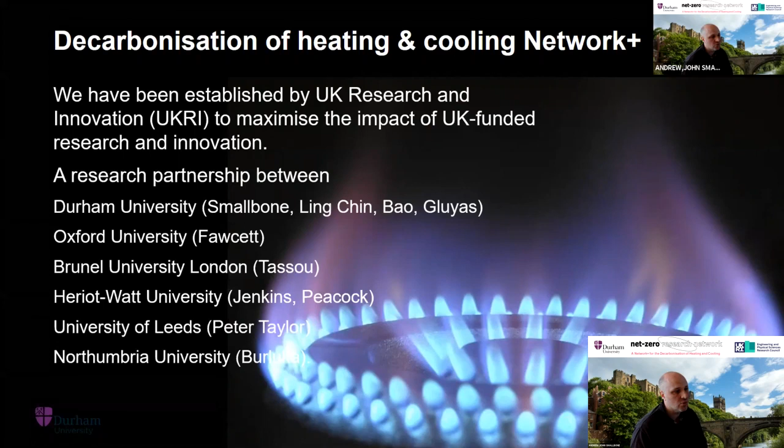The Network Plus is being led by Durham, Oxford, Brunel, Heriot-Watt, Leeds and Northumbria, and is supported and initially set up with lots of organisations supporting the application, but it's really for everyone. We might be leading it, but events, activities, speakers and so on are all from all over different places internationally and across the UK.

We have a number of core objectives. The first is to grow a world-leading UK-based research network around the topic of thermal energy, not tied to any particular objective, in the sense that it's just supposed to support net zero carbon heating and cooling, and also for residential, business and industrial sectors. It's not tied to anyone specifically.

We aim to bring together different kinds of groups, whether they're technology developers, end users, social scientists and policymakers, and we're trying to get them to talk together, because this is a whole challenge - it's an integrated solution that will lead us to net zero in heating and cooling. And we'll do that through a number of routes.

We're talking about sandpits, workshops, opportunities for secondments and studies, and wider engagement activities. We also aim to make some cross-cutting challenges via research and developing some consensus around them. And then we have some flexible funding. This last point is really about having funding to support secondments, startup research activities and so on, and also how to upskill our early career researchers so that we can keep the ideas coming.

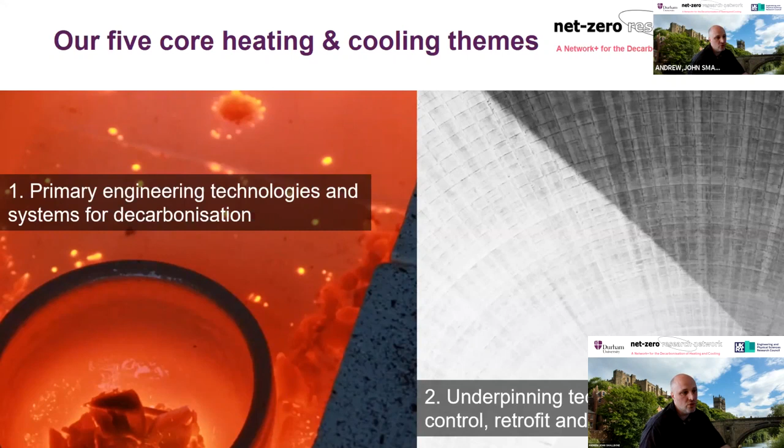Third theme is around future energy systems and economics. How does this fit in with the whole wider net zero challenge? Where does the energy come from for our next generation of heating and cooling systems? How much will it cost, and how will that be enabled?

Themes 4 and 5 are perhaps slightly less technical and more social science based. The first is societal impact: how do end users perceive our transition to net zero, and how do we build that into our thinking. Number 5 is more top-down: how do we support policy making and enabling this, and how do we support leadership to make difficult decisions that may need to be made to get us to net zero within the expected timeframes.

Now, all of this will be done through the network platforms. We're planning to help do this through what we originally put in as 20 co-organized events, which would be conferences, sandpits, trainings, and workshops. This was obviously pre-COVID, so some of this is changing a little bit as we talk, but to give you an idea, there will be a lot of events around this topic.

We will facilitate this through some secondments and travel bursaries when travel permits. And as I mentioned, there's some feasibility funding budget available, and that will be announced in due course. We're also developing technology roadmaps, which should help us explain what the challenge is to a wider audience.

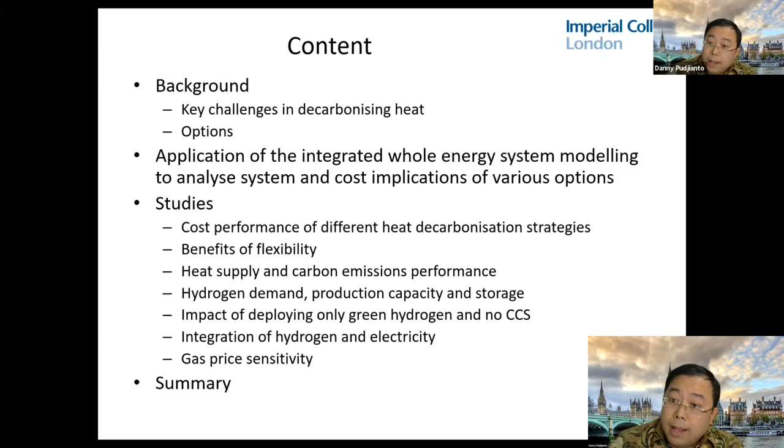So which heat decarbonization strategy along with the electricity is the key question we would like to address here. All scenarios of the studies relate to the 2050 scenarios, so all projected demands, costs, available technology, and so on are based on 2050 with net zero emissions. This is consistent with the UK government target, and it was also already discussed previously by Professor Taylor in the morning sessions, who summarized it very accurately.

But the problem is that while there is a clear direction on how to decarbonize electricity and transport, there is still quite a big disagreement on how heat will be decarbonized.

There are a number of options for decarbonizing heat: through green gases with hydrogen, biogas, and so on, or with electrification using heat pumps and resistive heating based on renewable energy sources. There may be a combination with hybrid heat pumps, plus district heating, bioenergy, and a combination of all those technologies plus something else - something else can be CHP, fuel cell, and so on.

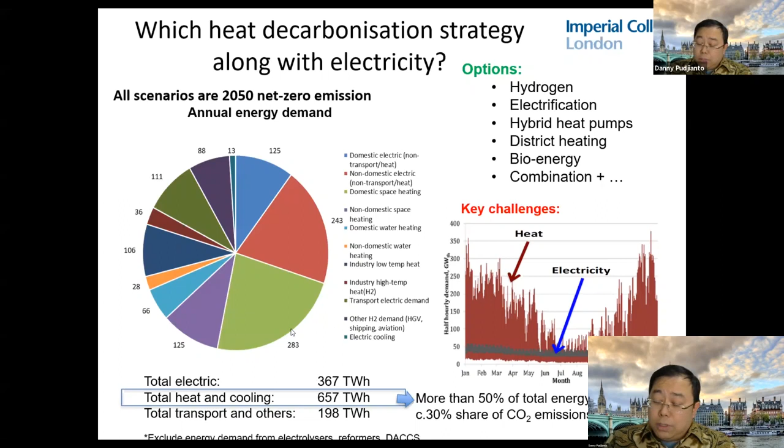Just to mention, this is the input assumption here, but this excludes the energy demands from technologies that will be optimized later on, for example from the electrolyzer, reformers, and direct air capture with storage.

So we use a tool called IWES, Integrated Whole Energy System Model, to model all of this. This captures not only the interaction between technologies, but also different levels of the system from the supply side, transmission, and distribution up to the demand side. We also consider different flexibility technologies from the demand side, flexible generation, the network, storage, and the interchange between the UK and, for example, Europe.

In the UK, we also model a number of regions - 40 regions, according to the DNO regions. And the solution is not only capturing capex, but also takes into account a number of different time frames, for example from investment time horizons in years down to seasons, days, hours, and even minutes. This is especially important for the electricity system to be able to operate securely and have sufficient reserve in the system to control frequency.

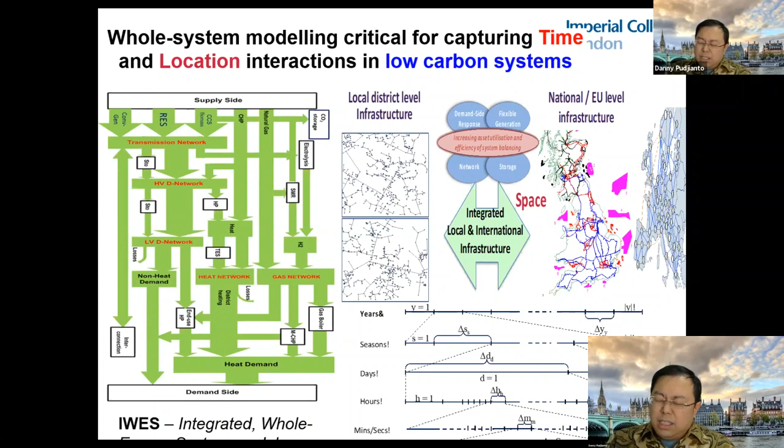So the optimization, IWES, in a nutshell, is a least cost optimization problem. It is to determine the investment and operation of the multi-energy system involving electricity, gas including hydrogen, heating, and also the CCUS system, which I think plays a very important role in future to meet the carbon target while maintaining system security.

There's a lot of input data assumptions needed by these optimization problems, from the load profiles - hourly or half-hourly - from electricity, space heating, hot water, transport, and also temperature, which then determines the COP of the heat pump, for example.

And it also takes into account a large number of technologies from power generation, different network, hydrogen production technologies from methane reformers, electrolysis, bioenergy with and without CCS, hydrogen network, heating technologies like air source heat pump, ground source or water source heat pump, CHP, solar thermal, natural gas and hydrogen boilers, hybrid district heating, and so on. And also energy storage and CCUS systems, plus demand response.

And of course, there must be assumptions on the capex and opex of all of those technologies, and other constraints like the emissions that need to be achieved, security criteria, and so on. But I think what's important is the output data.

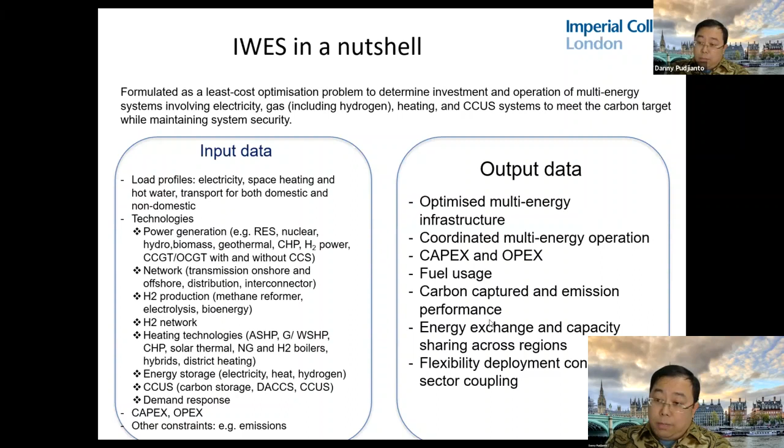So this is a kind of the first result that I would like to show you. We analyze here three kinds of mainstream pathways for how heat can be decarbonized: using the hydrogen boiler, primarily for customers with gas connections. But of course, for the off-gas customers, they need to use electric heating. That's the assumption in the study.

The second one is electrification. So all heat will be decarbonized through the use of heat pumps and resistive heating. And the combination of those, but using natural gas boilers instead of hydrogen, is the hybrid system. And we have two other scenarios here: whether the system is low flex or high flex.

The low flex system means that the system doesn't have significant demand response, distributed storage, having a limited interconnection capacity. While with the high flex, it allows the model to invest in those technologies.

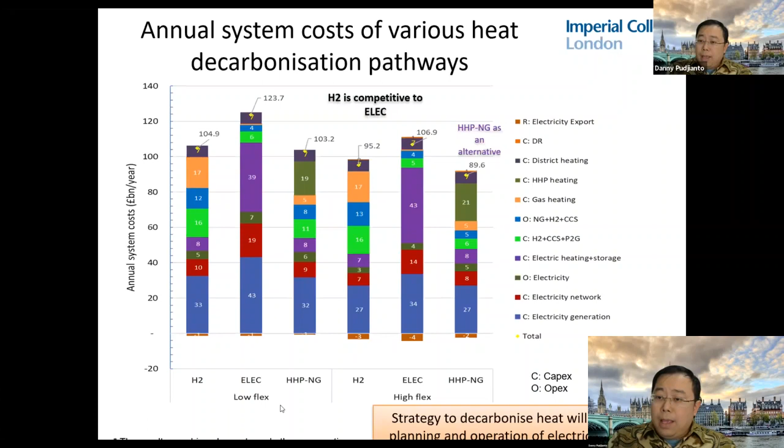I need to be quicker. So this result shows that there is also significant benefit of improved flexibility in all pathways, not only in electrification, although electrification is actually the one that needs significant flexibility from demand response, for example, or distributed storage with smart EVs, smart appliances, and so on.

But the benefit of enhanced flexibility also appears in all pathways, also in hydrogen pathways, for example with around 10 billion pounds per year. And with the hybrid, it also, for example, the importance of using the gas at just the right time, that also will reduce the cost significantly. And why flexibility is important in all pathways is because there are off-gas customers that use electric heating, but also because most of the electricity supply in future will be from renewables, as we will see later on.

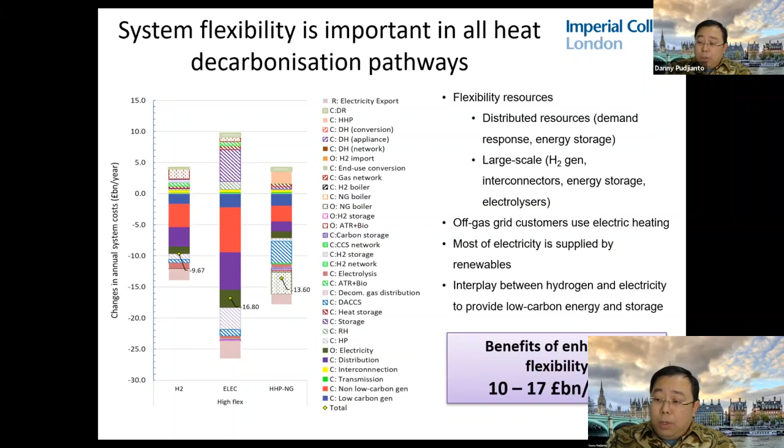There is also an interplay between hydrogen and electricity to provide this low carbon energy and storage. So how is the heat supplied? This left diagram shows the heat supply from different pathways.

With hydrogen, of course, that's using hydrogen boilers. In electrification, most of the heat is supplied by the heat pump, and with the hybrid combination, most is supplied by the heat pump, but some with boilers. And here, all of the scenarios use the same kind of district heating pathways.

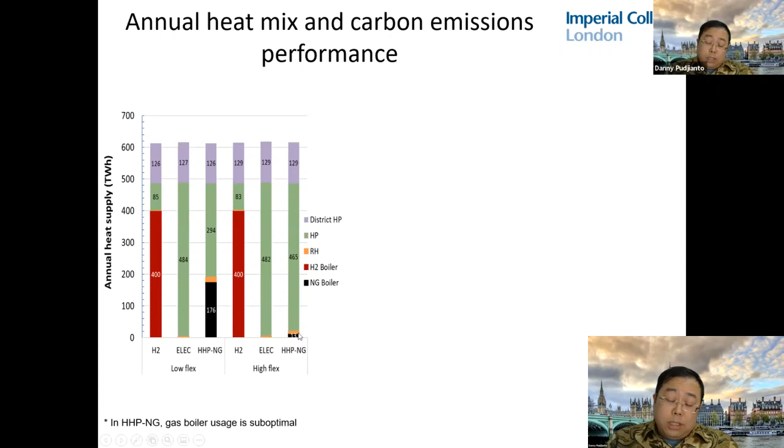But it's interesting that when the system is quite flexible, and also with the use of the smart hybrid heating system, the use of gas can be minimized here. But although it's used only very little, it provides a significant value, as we have seen previously on the previous slide.

Also there are some very small hydrogen, for example, or combustion offset from the biomethane. But in the hybrid with natural gas, this will require significantly larger direct air capture.

But although having said that, the cost is still cheaper, it's still lower cost. So this means that the use of CCS technologies, for example including BECCS and DACs, lets all technologies be deployed, although maybe it's higher carbon, in order to minimize the cost.

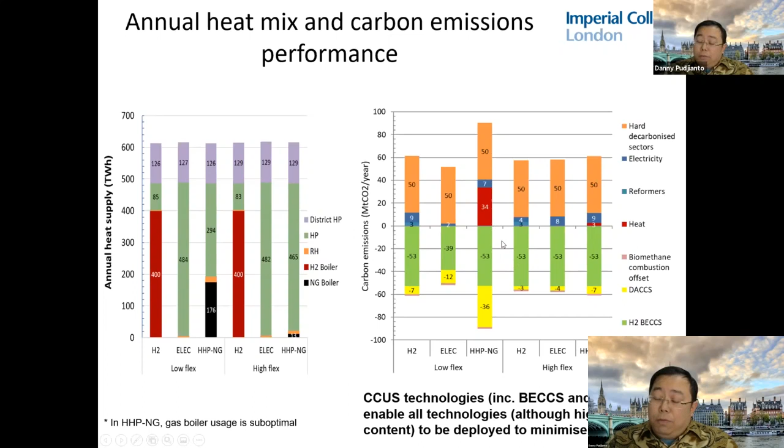Here we use autothermal reformers with CCS, and this produces blue hydrogen. This becomes, I think, the bulk of the hydrogen production, coming from this methane reformer because it is lower cost.

But there is room for electrolyzers, and although the electrolyzer is more expensive, it provides the system value, which makes it valuable to the system, for example in order to reduce wind curtailment and so on. So this helps the integration of electricity, and that's the reason why we think it's important for heat decarbonization also to be quite integrated with hydrogen.

On top of that, there will be some hydrogen produced from biomass, and its color may be brown or something like that. It's different in the different heat decarbonization pathways, there will be different mixes of how the hydrogen is produced, and primarily in the ELEC and hybrid pathways, for example, the hydrogen is also used for industry.

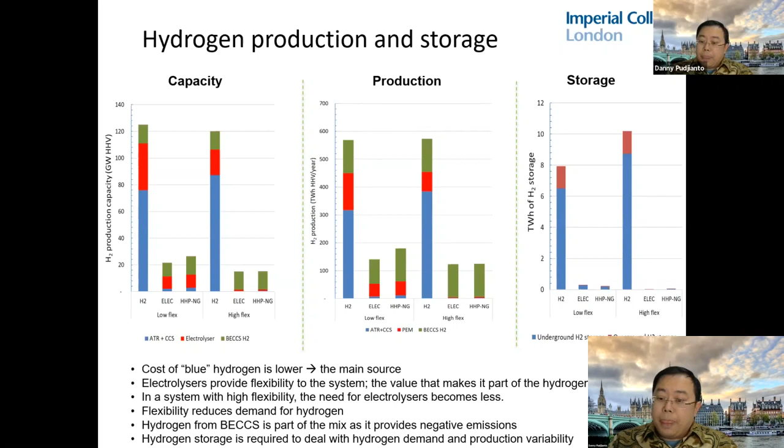And now the question is whether the hydrogen should be produced by the electrolyzer, the green hydrogen.

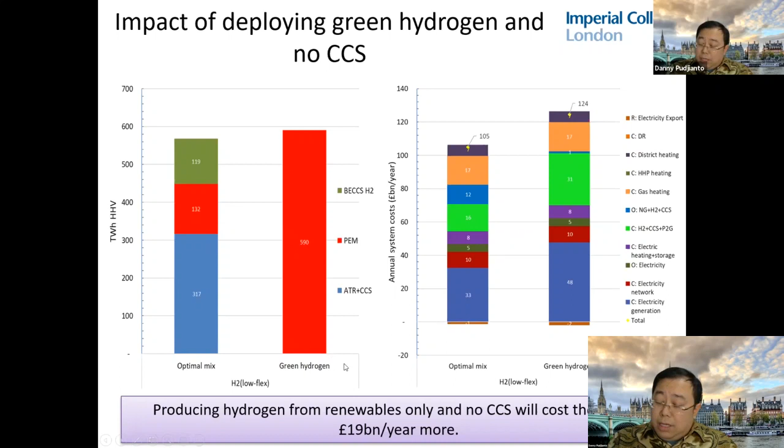So here we carry out a study comparing with the optimal mix, and if the hydrogen is only produced by electrolyzers, we see that the cost increases significantly. This shows that the system application is very important, because we will require a significant increase in electricity investment in low carbon electricity generation, but also investment in the electrolyzer. So having only green hydrogen may not be feasible economically, because it will cost 19 billion more.

So this is just deploying only green hydrogen with no CCS impact. The model can be used to analyze what the impact will be, and here we can see clearly the additional cost of having only green hydrogen: more low carbon power generation, more electrolyzer, more hydrogen storage, but you can compensate with the lesser cost of ATR and heating generation, and also the OPEX from the gas.

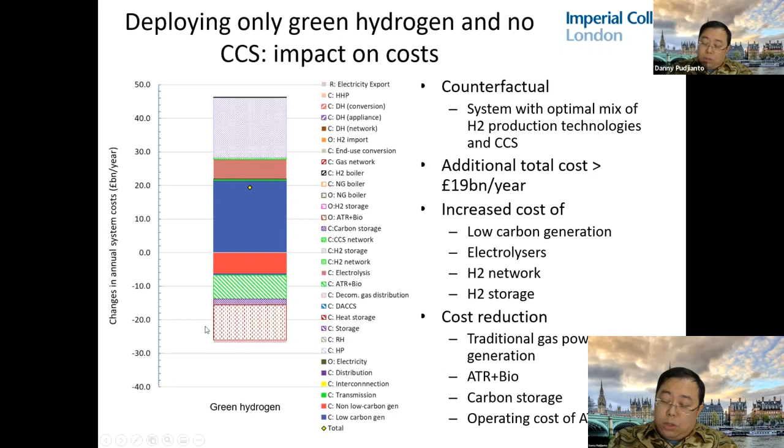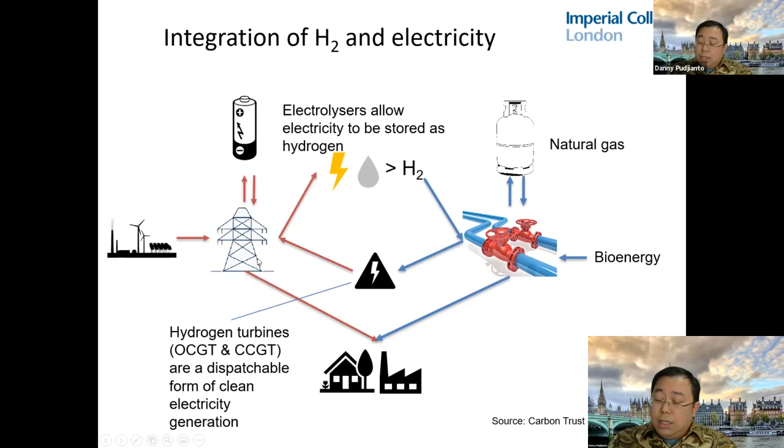So we carried out a study with two case studies: one with the silo approach, and one with the integrated approach. The silo approach means there is no electrolyzer, no hydrogen power generation. With the integrated approach, we allow the model to propose electrolyzer and hydrogen for power.

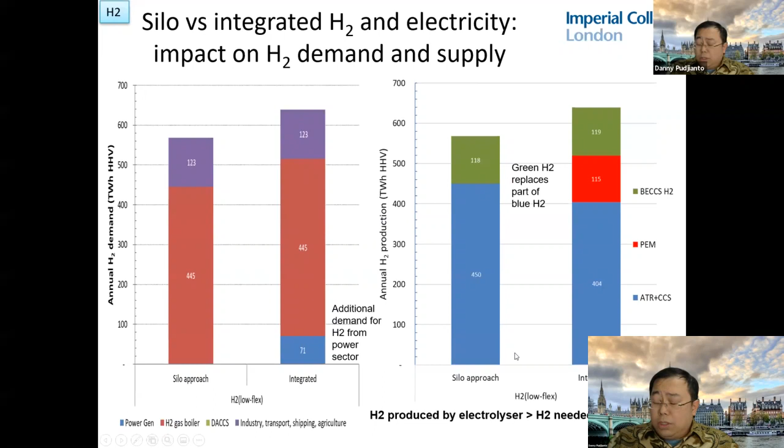We can see that in terms of annual hydrogen demand, this increases the hydrogen demand by 71 TWh, used in hydrogen for power generation. This is also reflected in the annual hydrogen production, where the electrolyzers actually produce a certain amount of hydrogen. So there is integration happening in the integrated approach, while in the silo approach these both systems are planned separately.

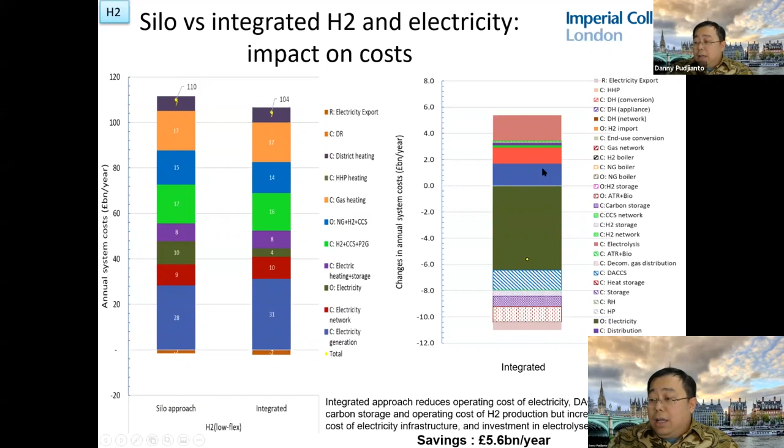And with the integrated approach, it will require less negative carbon offset technologies like DACCS, require less natural gas usage and hydrogen storage. But of course, this will require a significant increase in investment in low carbon technology and also electrolyzers.

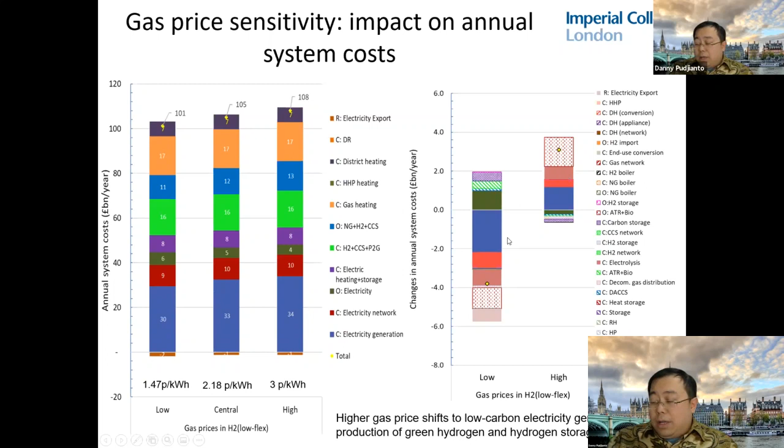That's, I think, quite expected results. So just to finalize my talk, in summary, the hydrogen pathway is a potential option to decarbonize heat. Other alternatives can also be considered, for example hybrids and full electrification. But improving system flexibility will benefit all pathways, particularly electrification, but it also improves or reduces the cost in the hydrogen pathway as well.

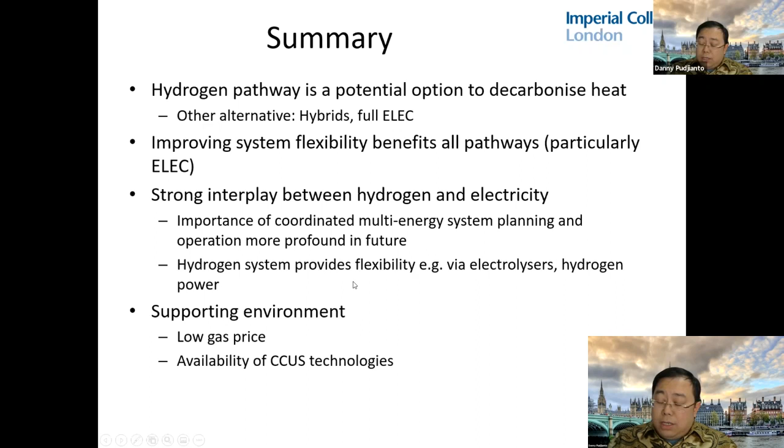There is a strong interplay between hydrogen and electricity, and that's the reason why we need coordinated multi-energy system planning and operation in future, because the silo approach will actually lead to a more costly system. Hydrogen systems can provide flexibility, so there is sector coupling flexibility from hydrogen to electricity, and vice versa.

Just to finish off, there's a strong interplay between hydrogen and electricity. We believe there is an importance of having coordinated multi-energy system planning and operation in future, stronger coordination than present practice at this moment. We've also demonstrated that the hydrogen system can provide flexibility to the electricity system. There is a sector coupling flexibility that needs to be harnessed through the electrolyzer and also hydrogen for power, and the supporting environment for hydrogen is low gas price and the availability of CCUS technologies.

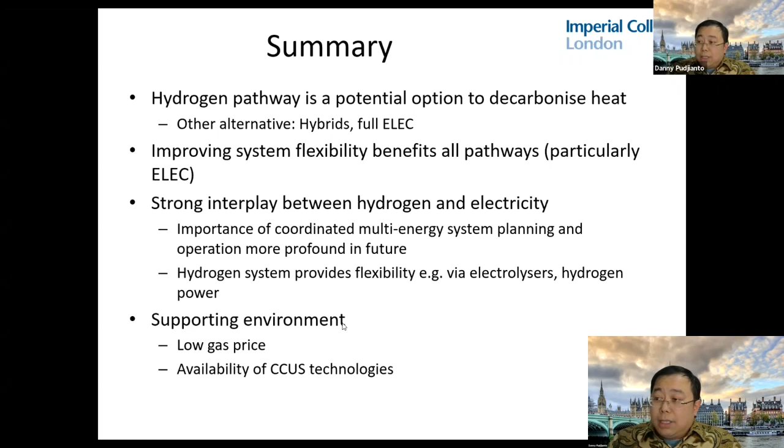Thank you. Brilliant. Thank you, Danny. I think, yeah, a lot to process there.

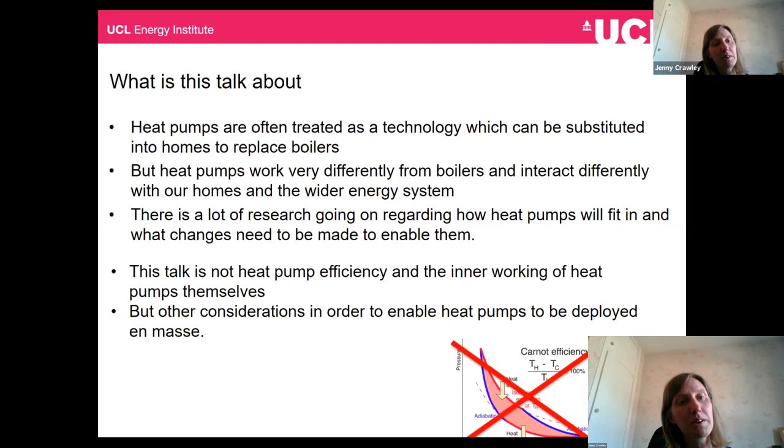So briefly, I'll talk about the interactions between heat pumps and ourselves, people, and with the electricity system and with our homes, the built environment. I thought I'd start with people, because this is the one that tends to get talked about less in technical conferences. So where are we now?

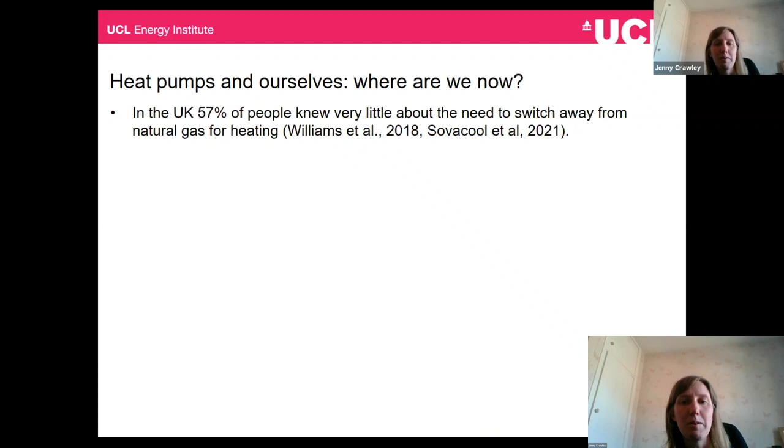Just a few statistics: it turns out that 57% of people know very little about the need to switch away from natural gas for heating. So this is our starting point, really - not very much motivation or awareness on that front.

But when we drill down specifically to heat pumps themselves, air source heat pumps, most people either haven't heard of them or have heard of them but don't know what they are. Again, not a great starting point - it indicates there might be a bit of a problem.

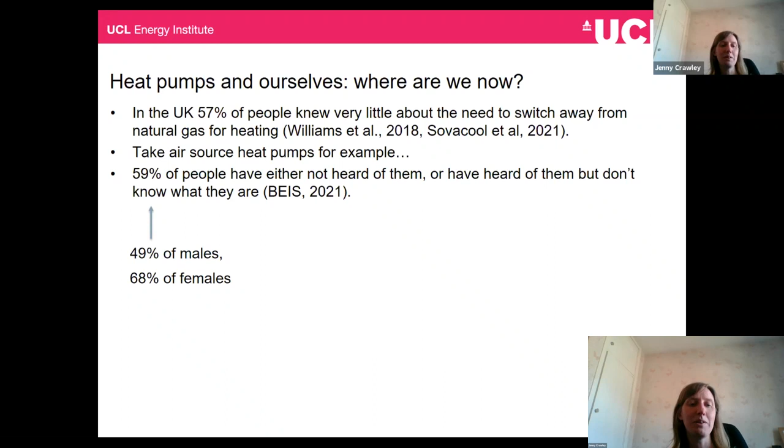I think it gets worse. If you divide that by gender, men tend to know a bit more, but women, my species, we don't know what heat pumps are. We know even less than men. Two-thirds of us don't know what they are, or we've only heard of them. Also, awareness of heat pumps increases with social grade, so those in lower socioeconomic groups are less likely to know what a heat pump is.

So I think from this, our starting point is we're in a place where there is lots of work to be done if we do want heat pumps to be adopted at scale. Okay, here's some references for those numbers.

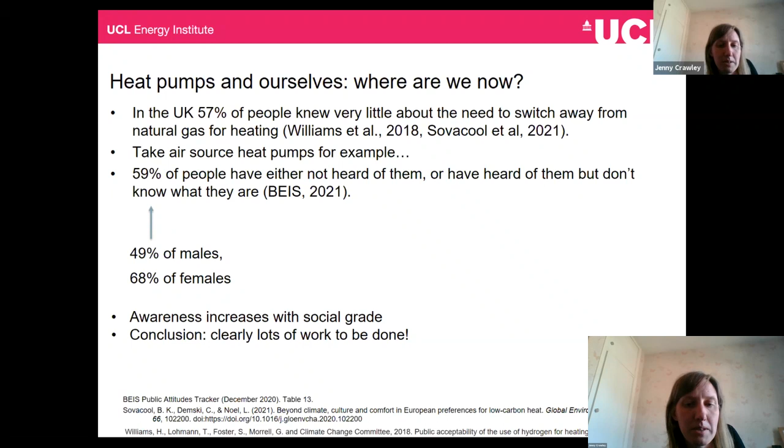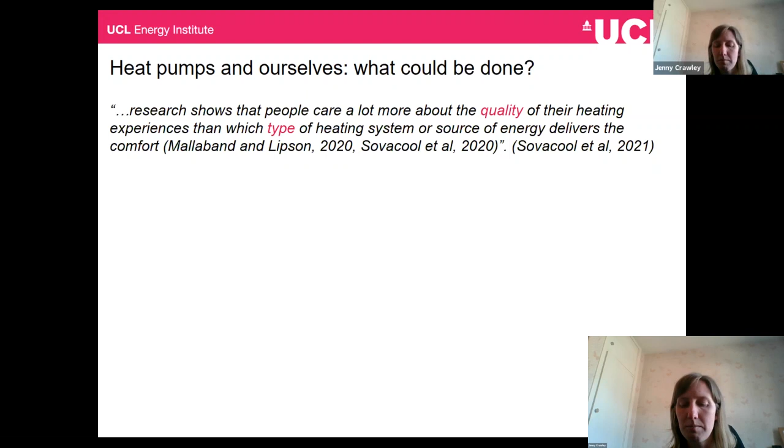But what could be done? This is quite interesting. We're told by social researchers that people don't necessarily care what sort of heating system they have in terms of what type it is, but they do care a lot more about the quality of their heating experiences. So what do we mean by quality? Specifically, people care about how warm and comfortable they can get, the convenience of operating the system, and obviously the cost. What this tells us is that if heat pumps can perform equally or better than what people already have in their homes, then potentially they are acceptable to people, because people don't really care whether it's a heat pump or a boiler, as long as these criteria are met.

Okay, so there is potential.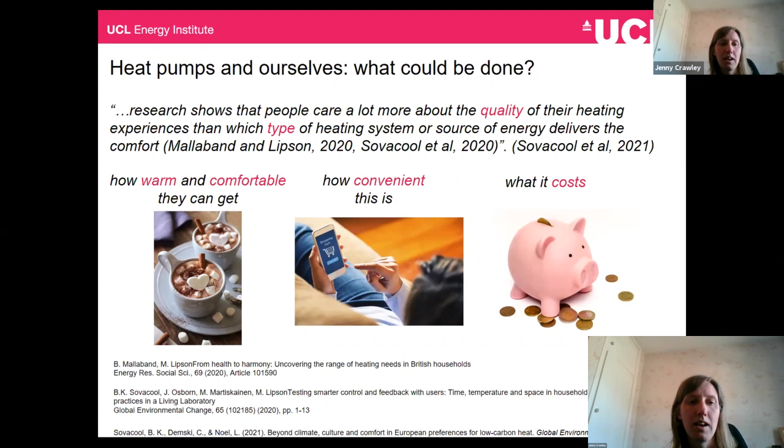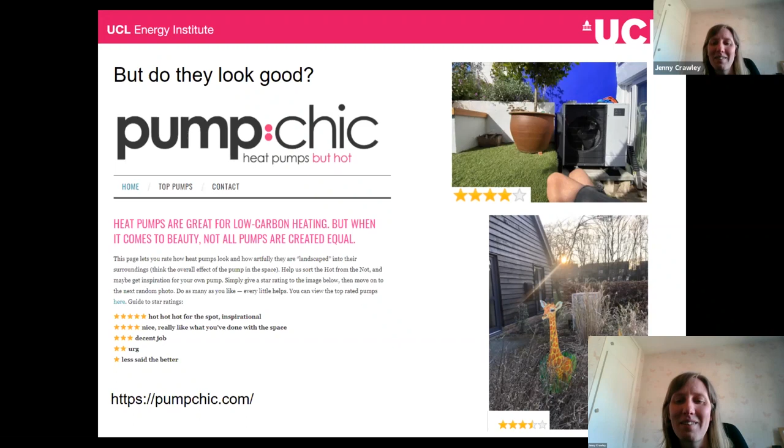Just a bit of fun here. My colleague Mike Fell has developed Pump Chic, a website where you rate different heat pumps in terms of whether they're hot or not. The serious point behind this is that if heat pumps are going to be deployed at scale, they need to be integrated in a way that looks good and is visually acceptable. So he's trying to find some beautiful ones, and people can decide how they're landscaped and whether they look nice or not.

So we'll move on to the relationship between heat pumps and the electricity system. I think Peter Taylor gave a really excellent introduction to this, if you were there this morning. The two main problems are the potential peak demand increase at both local and national grid scale, and the total annual electricity demand increase. There's a third potential problem called ramp rate, but recent work has shown this isn't so much of a problem, so we're just going to focus on these two.

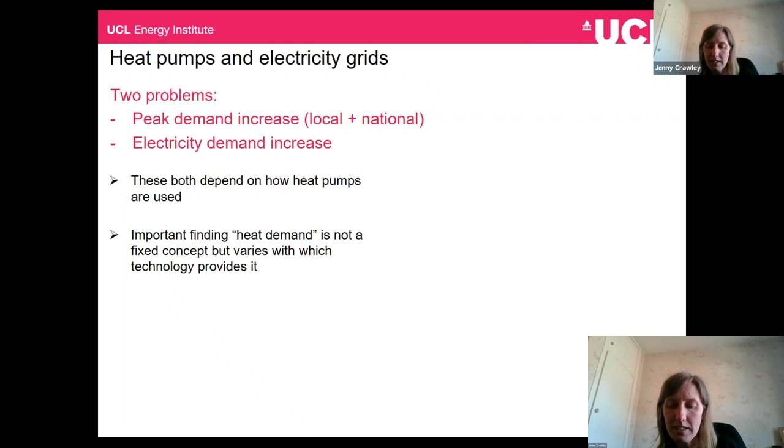Just as Peter was saying this morning, and we'll prove it in a minute, the nature of these two problems really depends on how heat pumps are used. It's important to say that heat demand is not some fixed, external, exogenous, platonic thing that just exists, but it varies according to which technology provides it. So we did some work a few years ago comparing the profiles you get from heat pumps and boilers, showing how much less peaky the heat pump profiles are compared to the boiler profiles.

These have both been normalized against their peak. When modeling heat pumps and boilers, you really need to use the most recent and best evidence on how they're actually used and how that aggregates, not just take a generic heat demand profile, because I don't think that actually exists. It's very much a function of the technology used. Otherwise, you can come up with results that are really out in terms of how much of a problem different technologies cause for the electricity system.

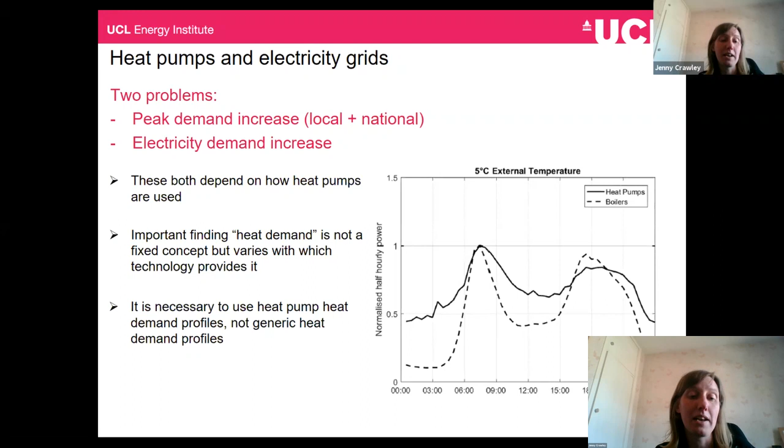Peter referred to Stephen Watson's work this morning. This goes into a bit more detail about what heat demand is like from heat pumps and what its shape is. In the most recent large-scale field trial, the RHPP field trial, Stephen found that over half of people were using the heat pumps what he called continuously, which isn't quite continuous in these graphs, but is more or less on all the time.

And again, why is that? Well, that's also a function of all sorts of things about how they've been installed into the homes, what kind of advice the homeowners had, and how people have adopted and are living with them.

And I think this is probably a worst case scenario for the future, because in this particular trial, a lot of the heat pumps were put into social housing, and people operated them like they do boilers, which we might not necessarily expect in the future. When these profiles are all added together, including people who ran them all day and people who ran them like boilers, you arrive at this graph on the right, showing the shape of current demand for electricity from heat pumps. As you can see, it still has two peaks, one in the morning and one in the evening. These peaks aren't half as bad as what you get from boilers, but nevertheless they are still there, and the system is still going to have to deal with them.

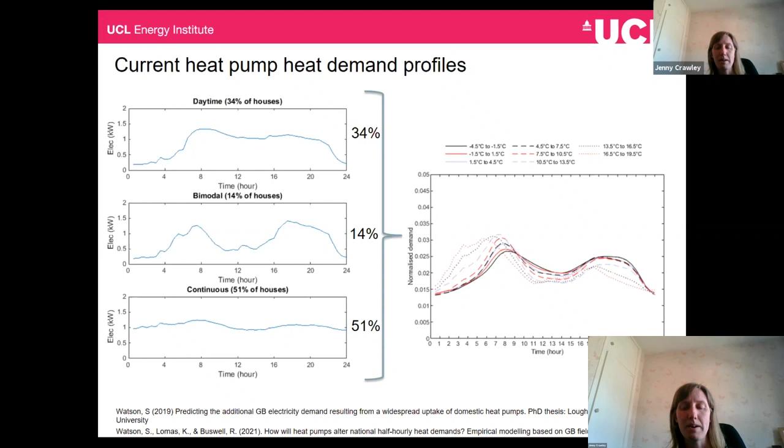So now we understand the nature of the peak demand problem a little bit. Stephen, in his thesis, did some work on adding this peak demand to the GB electricity system. To be quite brief about it, what he found is that peak demand is more than doubled, and annual demand goes up by a factor of less than 2. But these are huge numbers we're talking about. In his work he used this extreme example of 100% individual heat pump uptake, which clearly isn't that likely, but it gives us a boundary of the problem, and we see this doubling of peak demand, and how much extra electricity that would require, given these fairly realistic demand profiles based on real data.

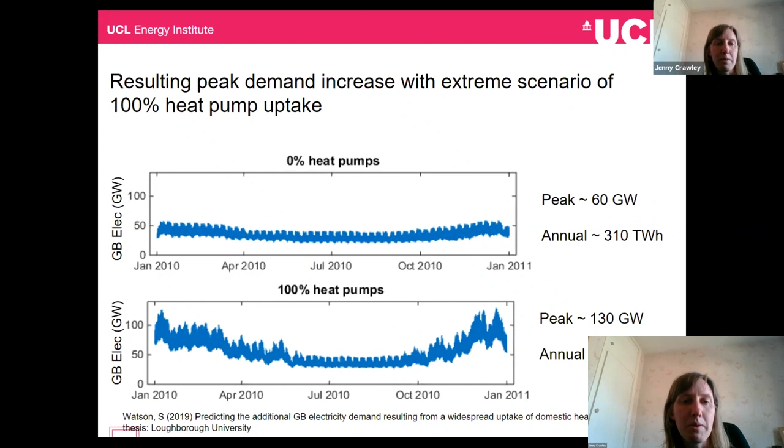So that's the problem quantified, I think, at its extreme of 100% heat pump uptake. So we've got this peak demand problem and this annual electricity demand problem.

We'll talk about the peak one first, and how will peak demand be met if heat pumps are deployed en masse. Your first option is to meet the peak, and your second option is to reduce the peak. Danny talked about this in his talk as well, the value of flexibility in the energy system. You can either reduce the peak by using a different fuel, so hybrids at peak times, or you can go down the route of load shifting and heat storage, turning the heat pump on and off at different times and storing heat in various ways to make sure people are still warm.

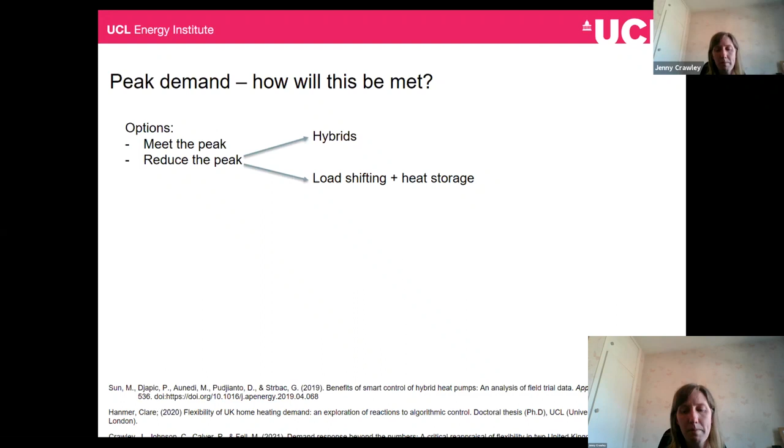Although I don't have time to go into a full discussion of all the latest research around this, I thought it'd be helpful to bring out some main messages from the literature. I think one of the main messages is that these options both have quite good technical potential, but interestingly, they're probably going to involve some degree of automation, in a way that when we run our current heating systems we do tend to have a bit more control about how they're run. Whereas with turning things on and off to optimize when we can integrate renewable electricity into the system, we're not going to be bothered to do that. Something's going to have to automate it.

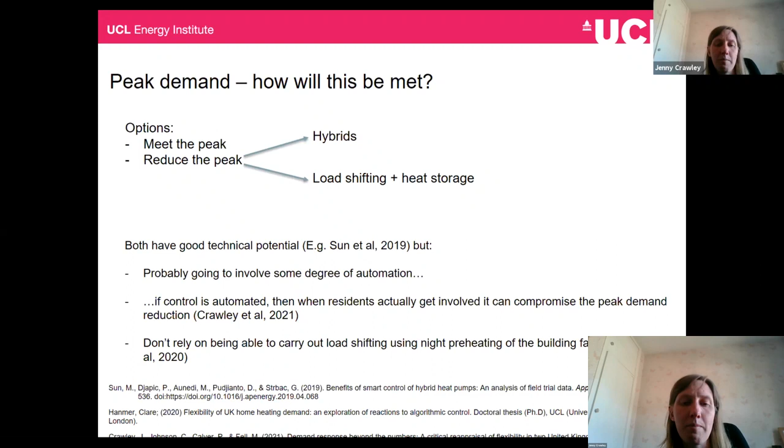But we've been finding in some of our recent work about people that if control is taken away from the householder, then actually when residents do get involved, it can actually muck things up. It can actually compromise the peak demand reduction. That's a really hard dilemma, because you don't really want a situation where when people are empowered and engaged to get involved, they actually make things worse. It doesn't seem like a really good way of doing things. You kind of want the people in the system to work together. So I think that's a bit of an unsolved problem, really.

The other thing is a lot of these scenarios rely on heat being generated by heat pumps at times when there's lots of cheap renewable supply and low demand, and some of them involve heat pumps being on at night. This is something we take for granted, but research has found that if you do run heat pumps at night and try to charge the thermal mass of the building specifically, people get too hot. So don't rely on being able to do this.

If you've got purpose-built storage where you can do this kind of thing, I'm fine. But if you're trying to just rely on the thermal mass of the house, then it doesn't always work. People do complain about being too hot.

So that's just a very quick smattering of work on how to meet peak demand. It's very much a socio-technical problem, not just a technical optimization issue. It's about how people get involved, and the things that might benefit them are actually causing quite a lot of disruption in their lives.

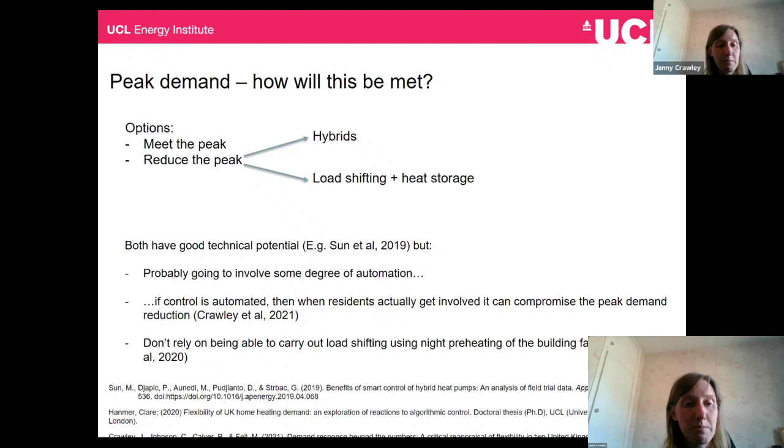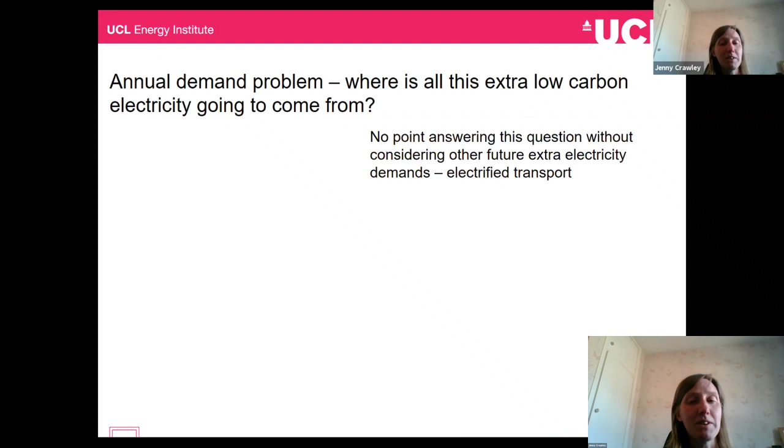So the annual demand problem: where is all this extra low carbon electricity going to come from? As I said this morning, I'm not really an expert on this, so I don't really have the right to talk about it. So I asked my modelling colleagues - one thing I acknowledge is there's no point answering this question without considering other ways electricity demand is massively going to change, namely transport. We're looking to electrify large parts of heat and most of transport, and there's no point considering them on their own.

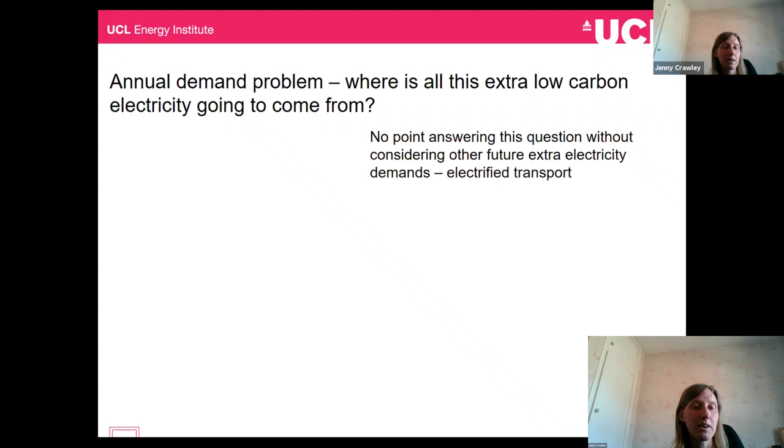So when you consider the kind of anticipated future electricity increase from heating and from transport, a number of people have attempted this problem of where the low carbon electricity is going to come from. Danny's team have done one analysis, my colleagues at UCL have done a different analysis, and this is Dr. Price's analysis with an 80% renewable share and a largely heat pump heated scenario.

His model, called highRES, has predicted that it'll be primarily wind and solar providing the electricity, with some natural gas in there, mostly with carbon capture and storage. And even that on its own isn't quite going to be able to meet these two different types of peaks, the daily one and the seasonal one.

So his scenario has batteries charging and discharging to meet the daily peaks, and to meet the seasonal peaks - it's not actually shown here, but his view is that it's going to be basically PV generating hydrogen and storing it for use in the winter. Because I think for me the winter versus summer discrepancy is probably a bigger problem than the daily peak versus daily average.

I think the jury is still a little bit out on where the electricity is going to come from, but here's one scenario in the literature of how it could feasibly be done.

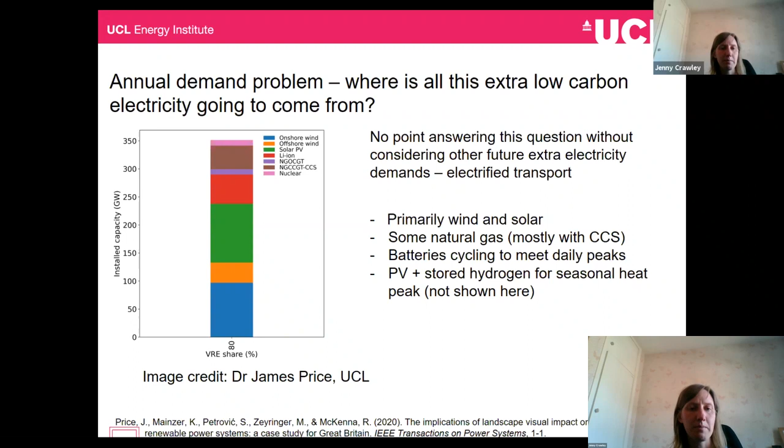Right, and finally, I will talk about our homes and the interaction between heat pumps and real buildings. I think the two problems that emerge here in the literature are: do we have to replace all our radiators because heat pumps like outputting at a low temperature, so do we need more radiator surface area? And then something that caused a lot of debate this morning - how thermally efficient do our buildings need to be?

And I think the main conclusion on these two is there's no clear answer to these, actually. There's a lot of opinions and no definitive clear answers. I'll give you a few examples of opinions from the literature.

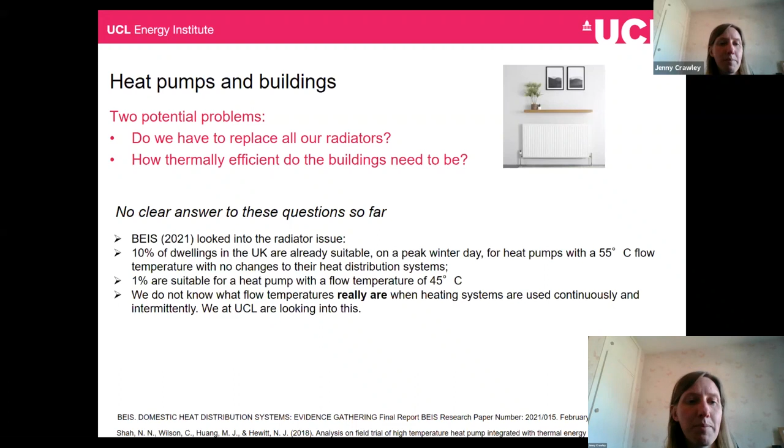So on the radiators question, there has been some recent work looking into this because it's pretty important - it might add quite a lot to the cost if we do have to replace radiators. I should say the research hasn't directly answered the question, because they weren't able to look at actual flow temperatures in heating systems and whether existing radiators can deal with low flow temperatures and provide enough heat.

So they didn't answer it in that direct way, but what they did do is get a load of EPC assessors to measure the physical size of radiators, and estimated from that the suitability for installing heat pumps. According to that research, only 10% of dwellings in the UK are already suitable for heat pumps if we run them at 55 degrees, and 1% are suitable at 45 degrees.

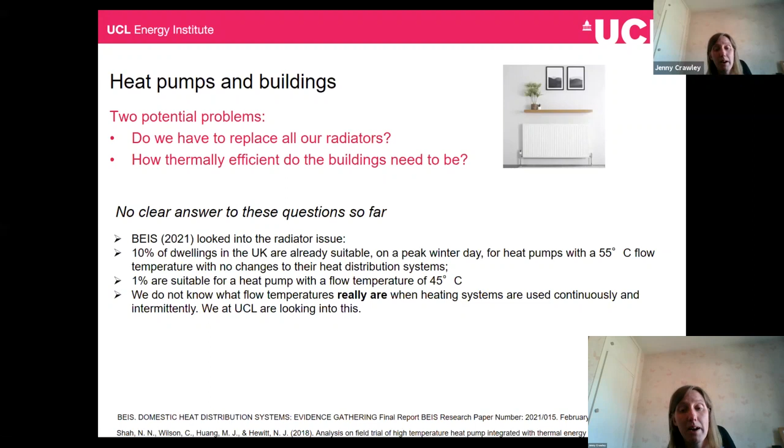But we at UCL are looking to do some research into this, which may answer the question more directly by looking at the real flow temperatures, especially when heating systems are used continuously - which is how we expect heat pumps to be run more and more in the future. So we'll be able to provide a better answer to that in a year or two's time. So on the thermal efficiency of buildings, again, people argue about this.

The most recent German field trial I've cited is from 2021. They concluded that it's actually not necessary to renovate buildings to make heat pumps run efficiently. They looked at flow temperatures of heat pumps installed in existing buildings and found they were mostly quite low, but only occasionally quite high.

I think what makes it a bit hard to extrapolate their findings to our situation is that they call buildings old when they're basically from just after the Second World War. Their oldest building was from 1949, but they didn't have any really old Victorian or older properties like we have.

We haven't really done the study empirically properly in the UK, but from model results, our findings are different, and it's recommended that there is quite a lot of thermal efficiency improvements needed regarding insulation and glazing.

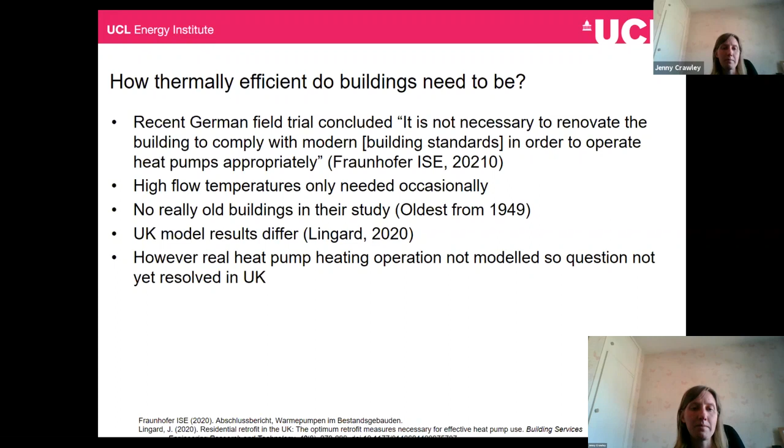But I would say this question really needs to be looked at more empirically. There's lots of examples of heat pumps being installed in really old Victorian houses at the moment to demonstrate they do work. But equally there's the other side of the debate, which says the more fabric work you can do first, the better. More research needed on that, really.

So just to summarise, if we're looking at integrating heat pumps into our energy system at a large scale, the first thing we need to do is make sure people actually know what heat pumps are. Sounds very obvious. We do need heat pumps to provide as good or better comfort, convenience and cost than current heating systems. I don't think that's impossible, I just think we need to make sure they do deliver to the consumer.

We do need a lot of extra renewable electricity, and I do think we need some seasonal energy storage. If we're going to look at strategies like demand shifting and peak load reduction, I also think we're going to need buy-in from householders, really engaging the occupants.

We do, I think, need some energy efficiency improvements of buildings, but it's really not clear to me how much we should do that before we get started with the rollout of heat pumps. And then more research needed regarding whether we need to upgrade the radiators or not. So that hasn't answered all the questions, but hopefully that's given a little bit of a smattering of the literature on some of the main questions around integrating heat pumps into the system.

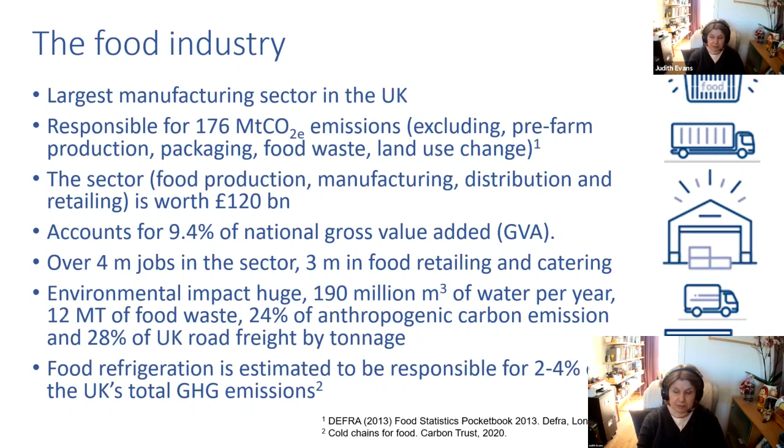It's got environmental impact, not only through the energy that's used, but also through the water, through food waste as well, and also through road freight. And the actual amount of greenhouse gas emissions associated with food refrigeration is actually not very well quantified at all. It's estimated by Carbon Trust that it's between 2 and 4% of the UK's total greenhouse gas emissions, but that really is a figure that's not well quantified at all.

However, what actually happens is that we export some of that food. So we end up providing about 55% of the food we consume. And there's quite a lot of food that we import, particularly fruit and vegetables. So this actually makes the UK relatively vulnerable.

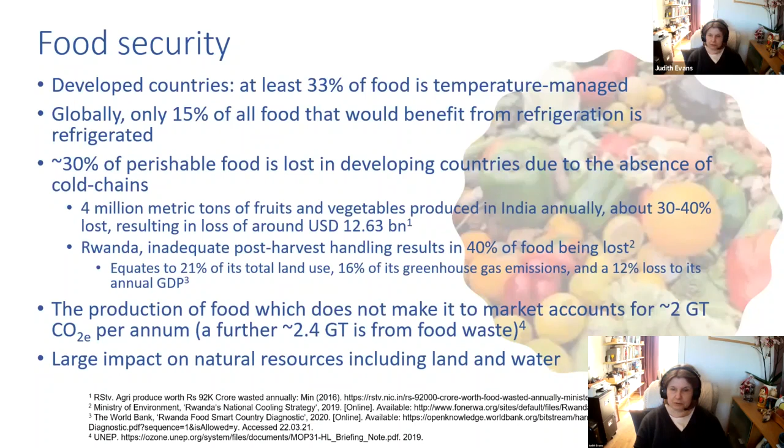So about 30% of perishable food is lost, mainly in developing countries due to the absence of cold chains. And probably another 30% is lost as food wasted in developed countries at the other end of the cold chain. That accounts for a huge amount of food waste. But it's not only the carbon that's associated with that food waste, it's also the impact on the natural resources, including land and water, that you're also wasting.

So the UK has a target to reach net zero by 2050. We've got a target to reach greater than 68% by 2030 compared to 1990 levels. And since the 20th of this month, we've got a target to reach 78% by 2035.

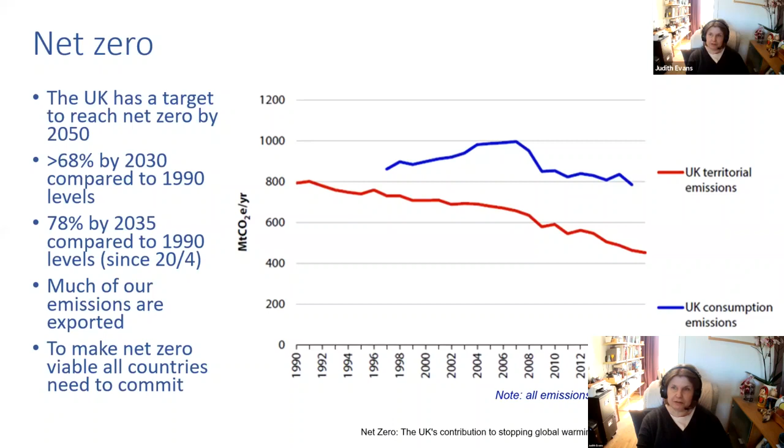So if we are going to be net zero, it's all very well the UK being net zero, and that's great, but we also have to look at what happens in other countries and also encourage other countries to commit to net zero as well. We have to also be clear what the target is.

There are lots of targets about being net zero or reaching certain percentages by different years. But within the food cold chain, it's not very clear what your baseline actually is.

We do know from sources like the Food and Drink Federation and DUKES, the Digest of UK Energy Statistics that emissions have fallen in food manufacturing, estimated by about 42% between 1990 and 2015, while at the same time the industry grew. So there has been significant decarbonisation within the food industry. But the actual impact that refrigeration has is poorly quantified, because those figures are for all production, not just refrigeration.

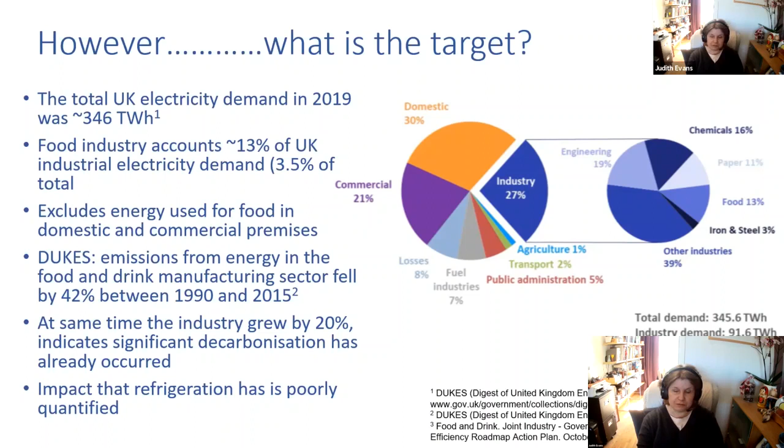As other initiatives, we're assessing what technology options are available now and might be available in the near future to apply toward achieving that zero target by 2050. I should stress it's not just about reaching zero carbon, it's the rate at which we do it, and the amount of carbon we're producing along the way.

This includes not just technical analysis, but also non-technical factors, applying predicted changes such as climate policy, population, etc. That's some of the work that will be done by other partners in the projects. One of the ideas is also to compare top-down and bottom-up approaches to looking at carbon emissions, to see whether we get any level of agreement.

As part of the project, we got support from quite a few trade associations across the whole food cold chain, and organisations that have promised us information from their members. So we're hoping we will get some really nice new data as part of the projects.

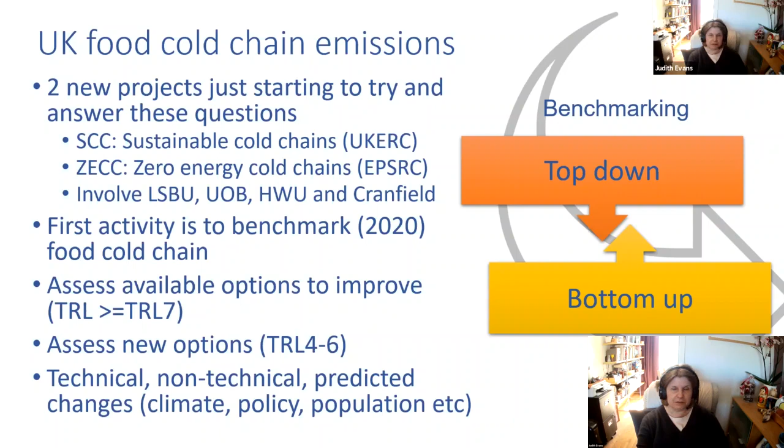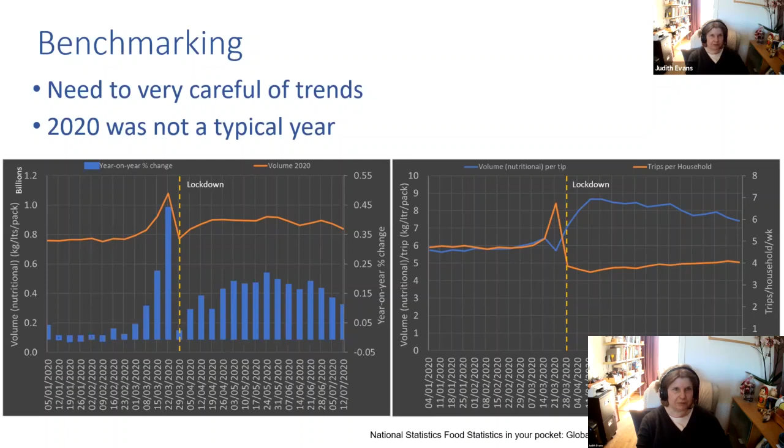So how do we reach net zero? There are lots of ways we can do it: we can reduce the need for cooling, shift, improve, and aggregate. I was going to show you a few examples from each of these within the time allocated. There's not time to go into too much detail, but I've tried to draw out a few interesting examples.

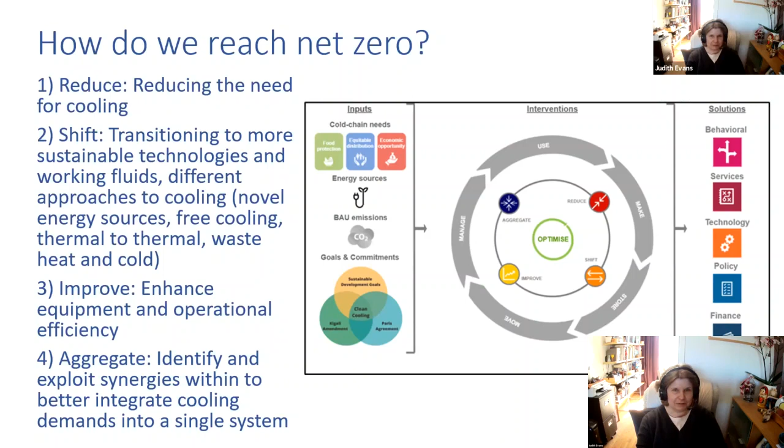I should also say something about emissions: in food refrigeration, carbon emissions generally originate from direct or indirect effects. The direct effects are mainly refrigerant leakage, and the indirect effects are from electricity. There are a number of challenges, particularly in refrigeration.

This is a typical refrigeration chart showing flammability and toxicity, where refrigerants are classed by different letters and numbering categories. Traditionally we've been down in the A1 area, which is low or no flammability and low toxicity. So traditionally we've used refrigerants that are relatively easy to use and don't have many associated safety issues.

We're now moving up more to these sort of refrigerants, either to A2Ls or A3s, which are highly flammable. We've always used B2 refrigerants such as ammonia, but there's more emphasis on using those sort of refrigerants because they're low GWP, and technically it's very difficult to get a low GWP refrigerant that's not flammable. So we have to look at different ways of applying refrigeration and managing it in the future.

Most of these technologies can be applied — we're not necessarily talking about amazingly new technologies. Technologies like ammonia refrigeration have been around for a long period of time. Things like using CO2 are slightly newer, but the application of A2L refrigerants, which are mildly flammable, is a relatively new innovation within the industry.

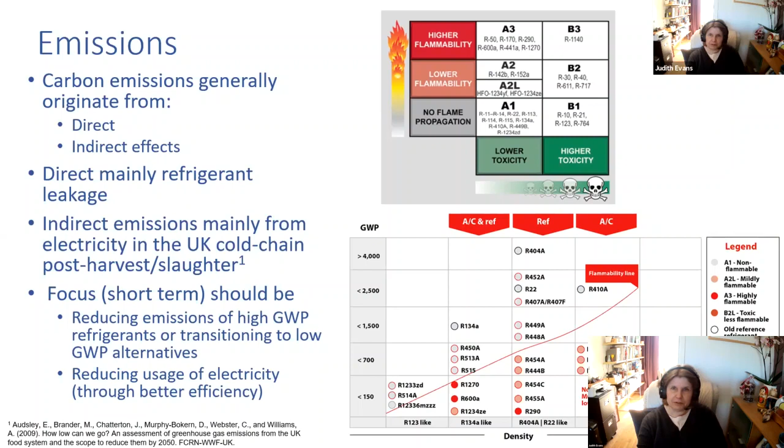So if we're going to actually try and reduce the carbon that we emit, it's not just a technical issue, it's a non-technical issue as well. Behaviour, policy and business drivers are involved. You also have to remember things like training and maintenance as part of the non-technical issues, which swerve across also into the technical side as well.

As a good example, doors on cabinets in supermarkets is actually quite a good example. This is some work we did a few years ago looking at a typical supermarket, showing the carbon emissions that could be reduced in a typical medium to large size supermarket in the UK. The size of the bubbles is the amount of carbon we could save by applying a technology — this is just some of the technologies.

We looked at about 80, 90 different technologies in all. The graphs show the uptake — how long it will take to actually apply that technology — and the payback as well, which includes not just the cost of the technology, but the installation costs as well.

You can see where you need to be is somewhere as close to this corner of the graph as possible, and with the biggest bubble that you can get. So your eye gets immediately drawn to the pink bubble, because the uptake time's very short, the payback time's very good as well, and you've got a pretty big bubble.

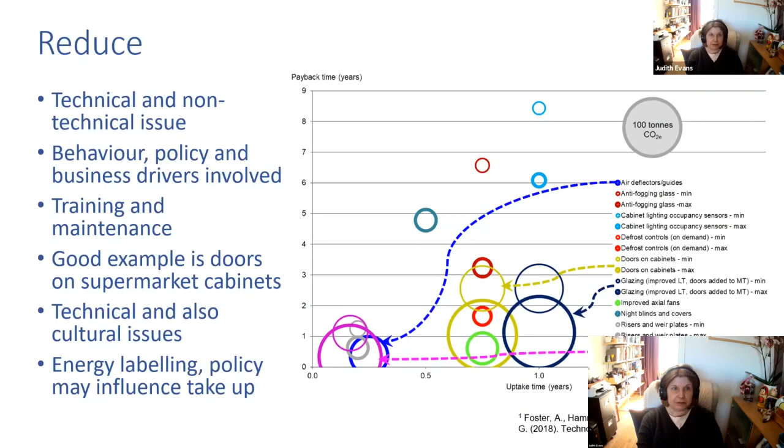In terms of shifting, energy storage is one option, and there's a whole load of different options that are available, and I know some of them we talked about earlier.

Most of the technologies being worked on involve latent heat storage or sensible heat storage, so they're in the thermal area. There's some work on the periphery of food refrigeration looking at mechanical storage, but otherwise very much at the moment it's very much in the sort of battery area. But also food itself can be used as a battery, and that fits in very well with demand side response.

Demand side response is already sort of used in cold stores. It's basically been used for a long time as arbitrage in cold stores, where they switch the cold store off at peak grid demand times. But it's coming more now into a demand side response approach, and recently supermarkets have also started getting involved in DSR.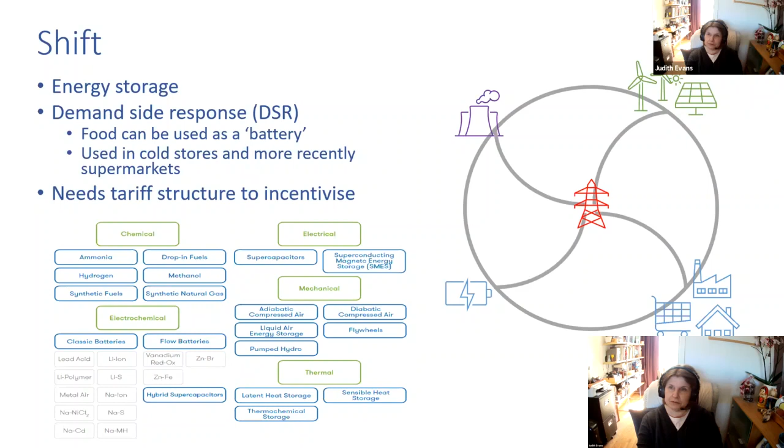There was quite a lot of work done a few years ago looking at DSR for domestic fridges. Although domestic fridges themselves don't use a huge amount of energy, when combined across everyone in the country having one or two refrigerators, it makes a huge impact being able to switch them off. But there was a lot of public kickback against something like that. So again, it's not just a technical issue, it's also a socio-technical issue, and even so, you still need tariffs to incentivize these actions.

In terms of improving, new technologies are great, but often there's a limited window when technologies can be applied. For example, cold stores are often replaced only every 30, 40 years, so you have distinct windows of opportunity when you can apply technologies. On the whole, most changes tend to be incremental rather than a step change. You very rarely go straight from the square to the circle - you go through all these other shapes first. Also, in refrigeration, many technologies have been under development for a long time and they're still not necessarily at the market stage.

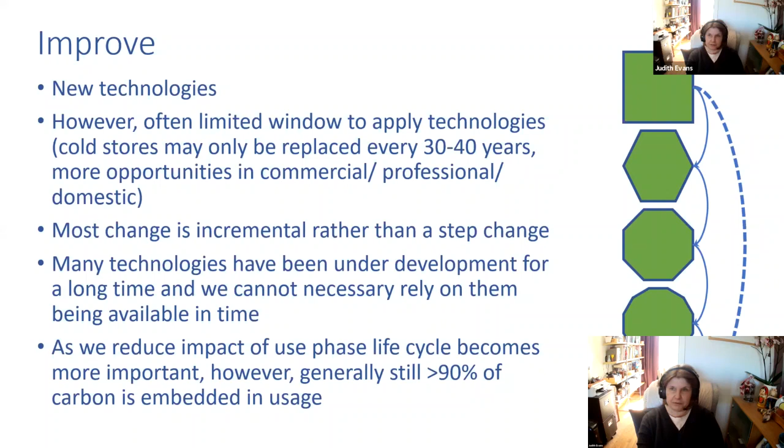You do have to remember that, on the whole, with most food refrigeration technologies, most of the carbon is still embedded in the usage phase. As you make things more efficient, that percentage does reduce, but it's still a very high level, so the impact during the life of the system is still the most important thing.

There's obviously other options that may be more likely in the future, which is fully integrating food systems into a grid or system. Work's been done by people like Danfoss, for example, who've integrated supermarkets into a heating and cooling network, and this may ultimately be the future of quite a few cold chain areas. There's quite a lot of heat rejected from refrigeration systems, so if you're starting to apply 5th generation heat networks, they are much more applicable than they would have been to earlier generation heat networks.

There's also new business models, things like cooling as a service, where people aggregate services together and basically sell cooling. This is particularly being applied in developing countries where users don't actually have the finances to buy equipment, and they don't have the equity to get loans. So cooling as a service is actually looked on as quite a positive model for low and middle income countries.

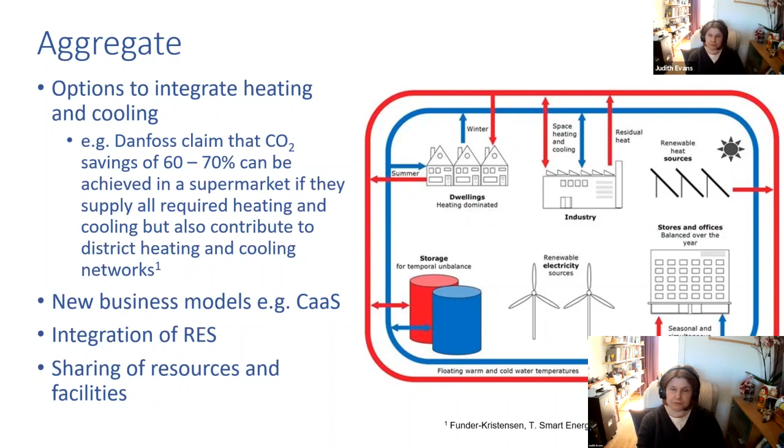There's also the integration of renewables more into the grid, and there's lots of opportunities for people in the food cold chain to apply solar panels or wind turbines. For example, in cold stores the roofs are often flat, and there's huge opportunities to cover them in solar panels, which is often done. There's also opportunities for sharing of resources and facilities across the chain.

One thing we have to remember is that we're not actually alone. There's a huge expansion in cooling in low and middle income countries, and access to the grid is an issue. Often in some of these countries, diesel gensets are used to provide refrigeration. We need to make sure that the countries now starting to use more cooling don't make the same mistakes as we've made, and that we help them ensure the best low carbon technologies are applied.

This is something we're involved in called ACES, the African Centre of Excellence for Sustainable Cooling, which is partly funded by a number of governments, including ours, to try and make sure that countries - this one particularly in Africa - take up the best low carbon technologies.

Sorry, I'm going a little bit over time, so I'll rapidly finish. Basically, to conclude, there are significant challenges to reduce emissions. We need to also be very careful that we don't export our emissions to other countries, and we do our best to help them make sure that their cooling is low carbon.